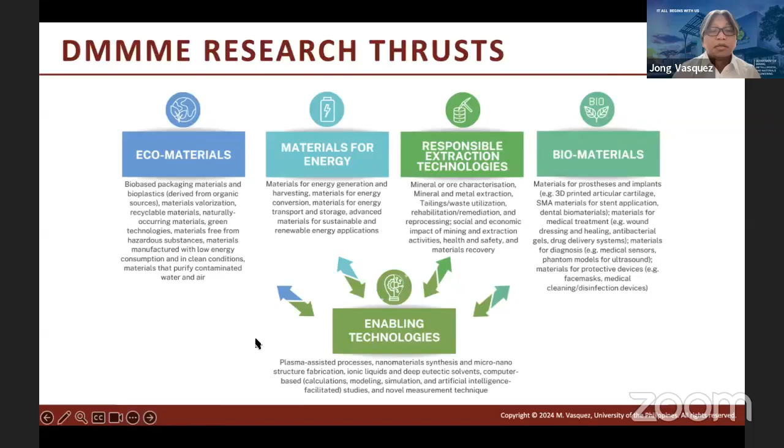This is our lab, the Plasma Material Interactions Laboratory. This was founded 10 years ago, and so far we have trained and graduated 88 undergraduate students, around 34 graduate students, and we have published more than 60 publications. In terms of funding, we're able to generate more than 300 million pesos worth of funding.

In the lab, we have this approach, similar to what Professor Henry Ramos also did when they had the plasma physics lab. So we have adopted a modular open systems approach. In this way, for a given system, we're able to configure and try different configurations of the system without really buying a lot of components or parts.

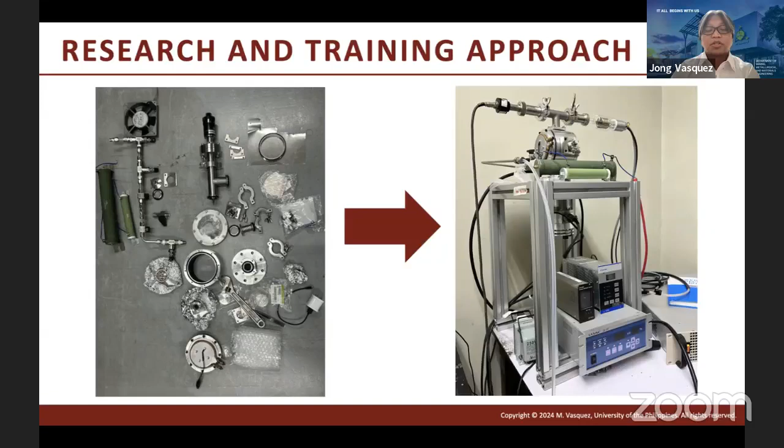This is an example of how we design and build our system. This was built by one of my students, and she assembled this and then used it. This is a compact magnetron sputtering system, and she used this to deposit different films.

In the lab, we are very highly experiential. Students and researchers are heavily involved in doing research, from designing, doing some models, assembling the system, and then, of course, operating and troubleshooting.

We are also highly collaborative, and our new members or new users shadow experienced or senior members in the laboratory, so we want to ensure continuity of the skills developed in the laboratory.

These are just examples of the systems that I have designed and built. Most of these are still in Japan. And this is now our laboratory.

We have different deposition systems. We have a single target magnetron system like this one, and this one is a multi-target magnetron sputtering system. This is a low energy ion source, CVD system, and other deposition systems.

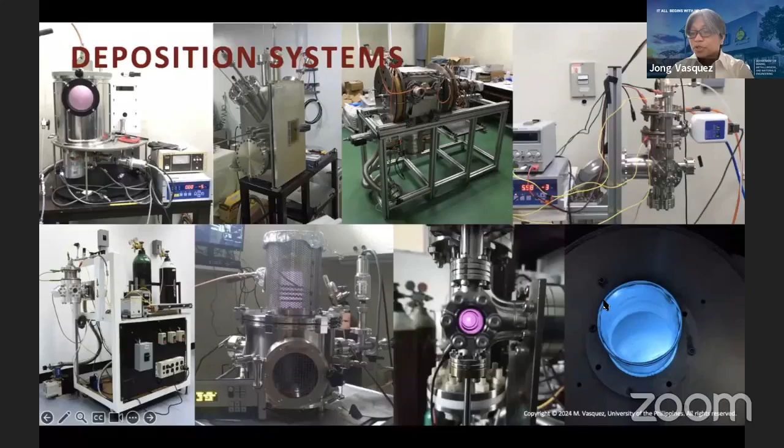We also have systems that we use to modify surfaces like this one, which operates in high vacuum and in subatmospheric conditions.

Recently, we've been developing atmospheric pressure plasma systems as shown here. We have a jet type and dielectric barrier discharge type systems, where we use these to modify different surfaces, both organic and inorganic.

And then these are newer systems. This again is the compact magnetron system. At the center, we have a multi-target magnetron sputtering system, also compact, just a small one.

On the right, this is a DBD system that we use to modify cotton threads, so we can improve, for example, its dyeability, its wettability, and so on.

In the lab, we also have the UP Diliman microfabrication facility. We have some equipment that can be used to fabricate devices and basic characterization tools, including a clean room, or the white room, and the yellow room.

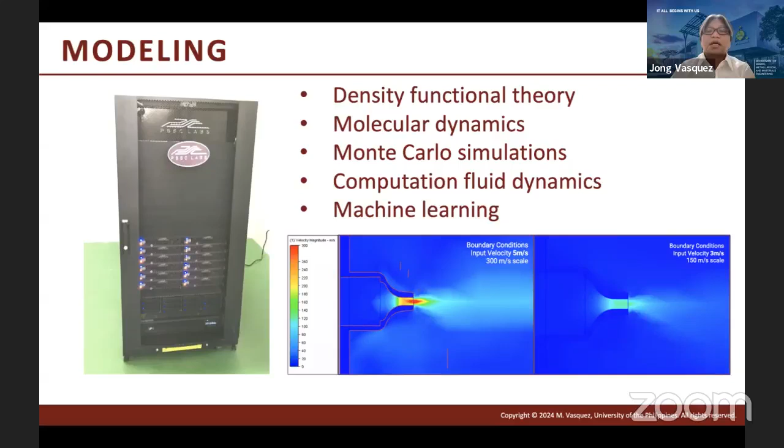We also have our computing system, around 200 cores, where we do basic materials modeling, mostly DFT, MD, and Monte Carlo simulations. More recently, we've been doing computational fluid dynamics for our plasma jet nozzle simulations.

Rapid prototyping is also important. Once we have our design, the simulated model and so on, then we have our 3D printers where we fabricate our own nozzles and use these nozzles to try in our atmospheric plasma system.

In this case, by just varying the width of the channel, we have different effects or different ways of producing the plasma plume, like shown here. Though maybe in the picture it doesn't really show any difference, in actual operation there's some difference.

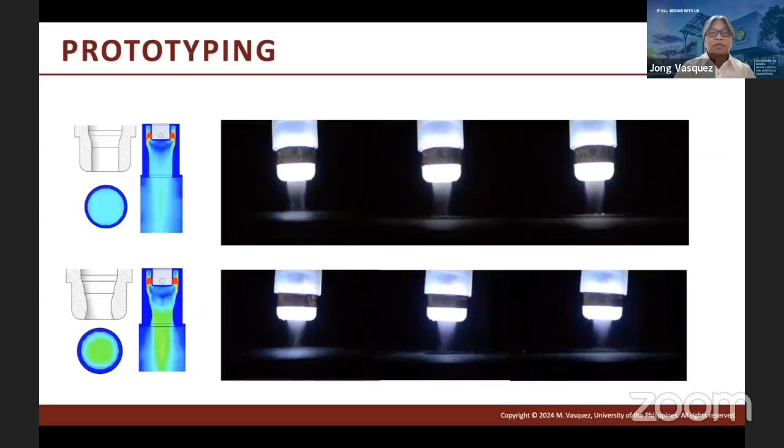This is another modification, and because of the rapid prototyping process that we are doing, we can do a lot of iterations of different nozzle designs like these two.

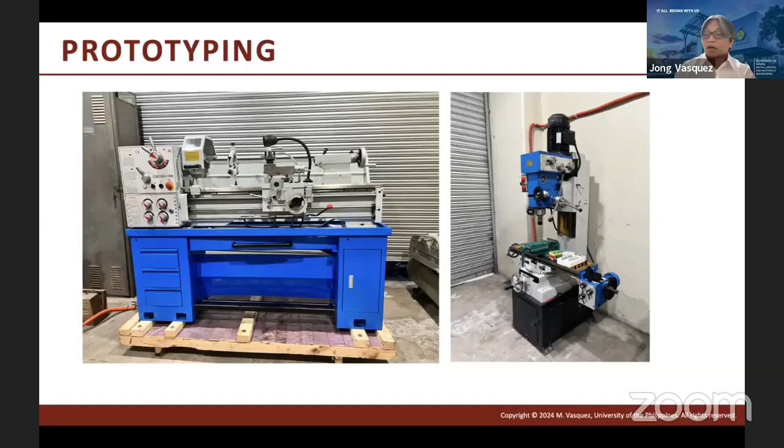After that, we also have basic machining tools, and we use these to finalize the nozzles that we have developed for actual application.

In our laboratory, we do a lot of research on device development like PVD or physical vapor deposition, CVD or chemical vapor deposition, low energy ion sources, and atmospheric pressure plasma sources. Most of our work involves either growing thin films or modifying surfaces, and in terms of materials, it is also broad, from metals to nitrides, oxides, and even polymeric materials.

And in terms of applications, we have also varied applications depending on the need of the industry or the priorities of our science, our Department of Science and Technology.

So let me now shift my talk to plasma. What is plasma? If you're watching this right now, you might be using a device that at one point in its process went through a plasma-based process. So why plasma? Because we can't get along without computer chips and mobile devices.

In the previous decades, probably since the 1960s and 70s, plasma has been heavily used in the production of integrated circuits. At present, we are diverging or looking at other applications of plasma outside microelectronics.

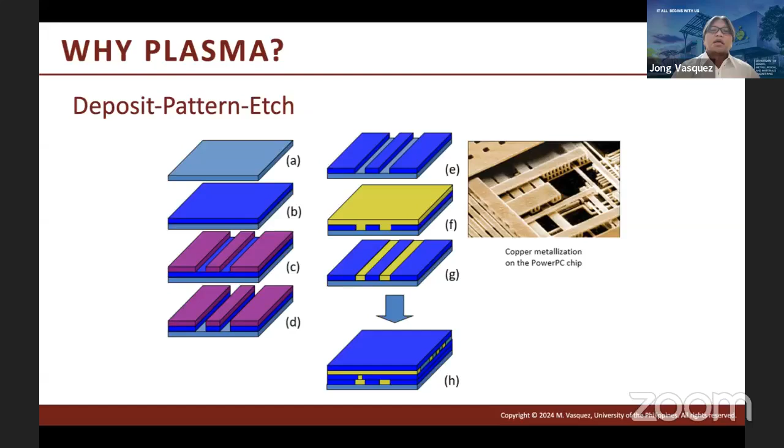So before, plasma is one of the processes used to fabricate these computer chips or the device. It's a series of deposit, pattern, etch, and so on.

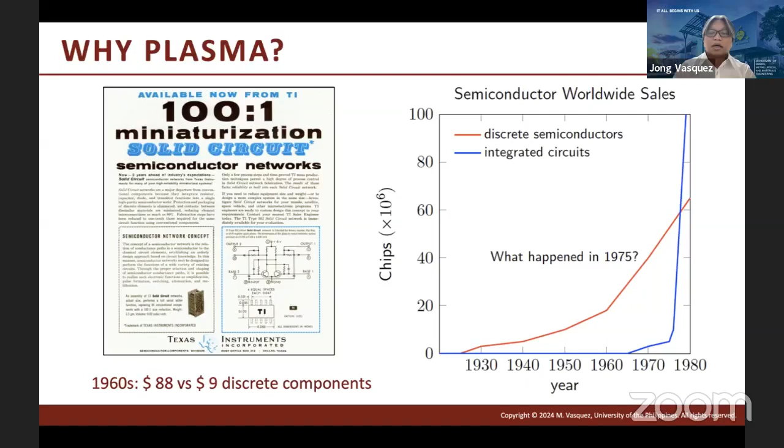Without plasma, we probably would not be enjoying integration of our devices. Unlike before, when we used to have discrete components, with plasma, or actually with the use of ion sources or ion beams, we're able to miniaturize and integrate these transistors in a very small area. And that's why we have solid state electronics.

Aside from that, we have plasma around us. You may not be aware, but you might be using devices that were enabled by plasma. So plasma and the technologies they enable are pervasive in our everyday lives. Each one of us touches or is touched by plasma-enabled technologies. Because of this, we have better quality of life now and improved economic competitiveness.

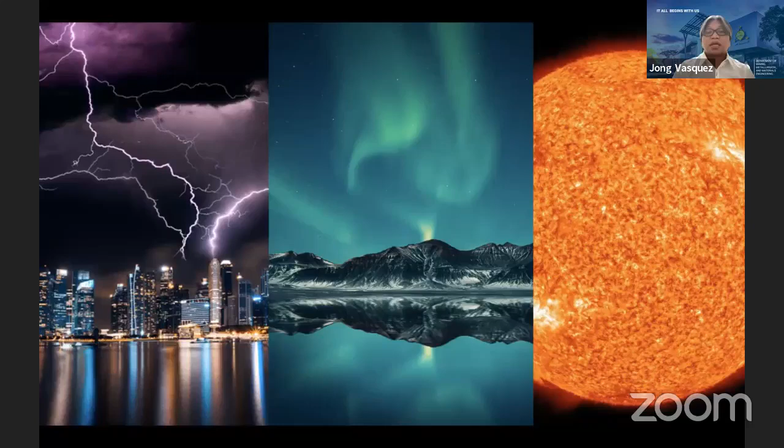So plasma is everywhere. It occurs naturally, like the sun or lightning or even the aurora. But what we are interested in are plasmas on Earth. We call this terrestrial plasma. Two common examples of this are the neon sign and the fluorescent bulb.

To further illustrate plasma, let's look at this. You have a solid, usually the atoms are ordered, but once you start increasing the temperature, it starts to liquefy. Another example is ice. Once you heat ice, it turns to liquid, so it becomes deformable. The atom arrangement now has some separation between these atoms or molecules.

As you further increase the temperature, the separation becomes longer and you create gas, and it becomes compressible, and so on. The further you increase the energy, then you start to separate the electrons from the atoms, and now you create charged particles in the system. So you will have neutrals, gases, ions, electrons, and so on.

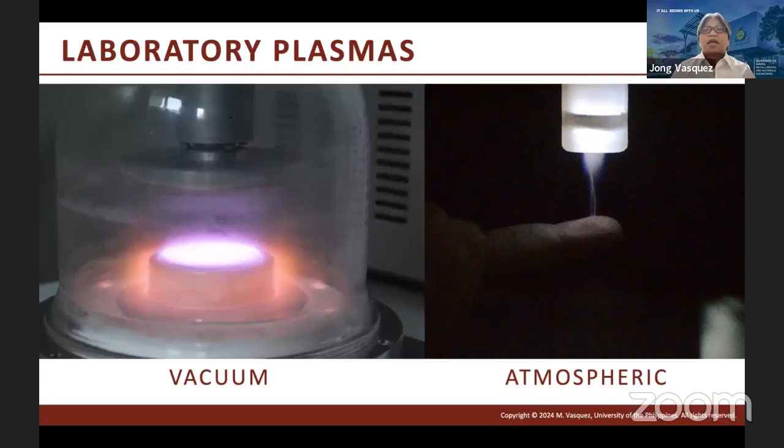As I mentioned, we are interested in laboratory plasmas, either in vacuum or in atmospheric conditions. These are some of the devices that we have in our laboratory. So how do we create plasma?

Essentially, one way of producing plasma is by accelerating an electron and making that electron collide with a neutral atom like argon. If the kinetic energy of your electron is more than or higher than the ionization energy of the atom, like argon, then you have a high probability of ejecting another electron from that argon atom.

And you create an argon ion.

In terms of electrons, electrons can be emitted by a filament. You can do this by heating the filament to produce thermionic emission, and then accelerate the electrons away from the filament. Once it collides with a neutral atom, then depending on the energy, it's possible that the atom can be ionized.

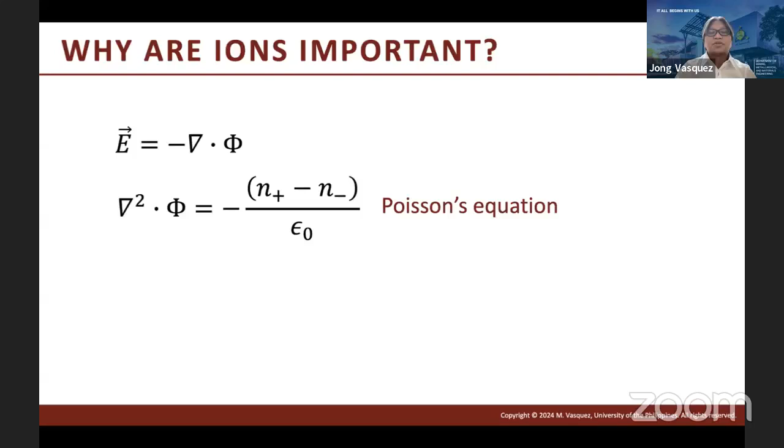So the reason why we want ions is because we can manipulate the charged particles using electric fields or magnetic fields. In this way, you will have more control in terms of the interactions that you want to get from these gas discharges. So if you're interested in the density of your charged particles, then you can solve the Poisson equation.

So when we create plasma or ions, there are two things that we have to be aware of. One is the creation of charges—this is the ionization step. And next is the transport of these ions: how do we make these ions move so that they interact with your material?

So in general, if you have a plasma, then you have your neutral gases or neutral particles. You may have some excited gas particles—they are not ionized, but they're just in the excited state. Some gas particles may be ionized, and you have your electrons.

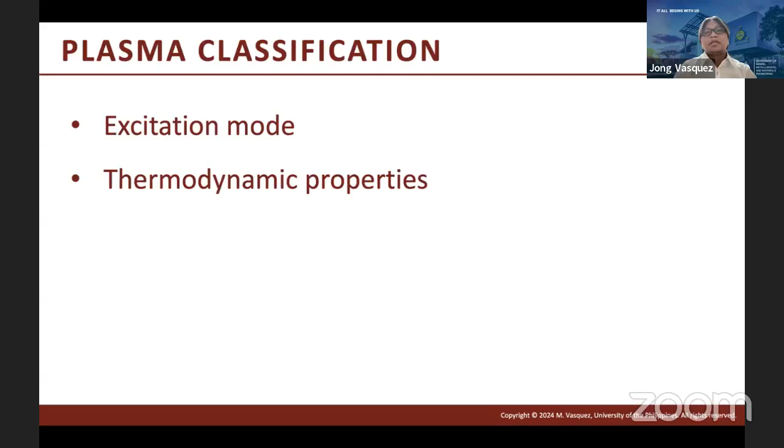Now, when we classify plasma, there are two ways to classify this: either in excitation mode or in terms of its thermodynamic properties.

In excitation mode, if you're familiar with plasma, you can create gas discharges either using direct current or alternating current. For DC, you can create a good glow discharge. If the potential is high, then you might create some arcs or corona. Another configuration of interest is hollow cathode discharges.

If you have alternating current, then you can use dielectric materials like in dielectric barrier discharge to produce the discharge. And then you can use high frequencies to produce the plasma.

Now, between DC and AC: in DC you have limitations in terms of the use of electrodes, because they should be conductive. Unlike alternating current, where you can use different materials, from conductive to non-conductive. For direct current, usually the plasma is low energy—actually, it's low density but high energy. Unlike in alternating current excited plasma, where the density is high but the energy is relatively low.

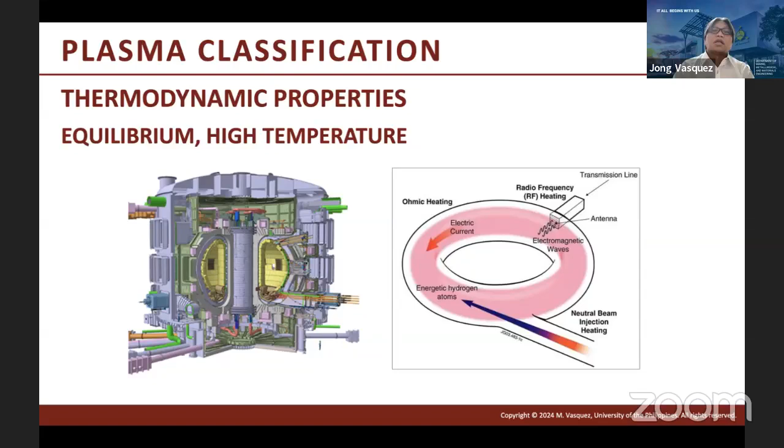Comparing high and low temperature plasmas: at high temperature, you achieve close to full ionization, meaning all of your gas particles are ionized. In low temperature or cold plasma, you have partial ionization, and usually this ionization is really low, especially at low pressure or vacuum.

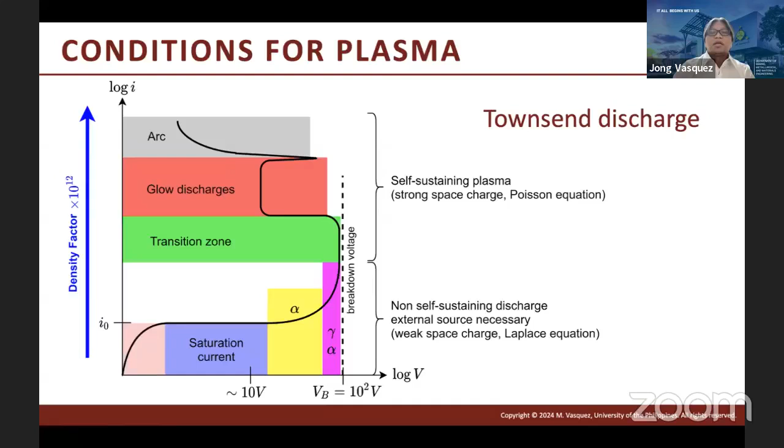In order to sustain the plasma, you also have to understand Townsend discharge. Even if you create charges, sustainability is still difficult - you may create the plasma, but it will just self-extinguish. So you need to increase the potential until you reach the sustaining region of your discharge. This is where you also produce secondary electrons in your system, which are used to sustain the discharge.

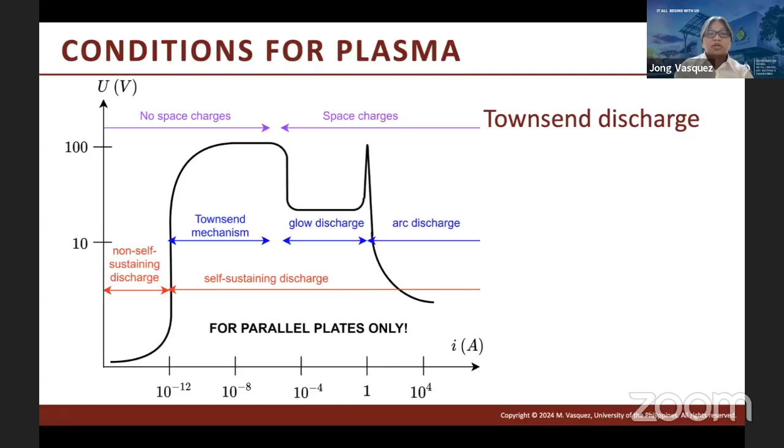For any plasma physicist or engineer, they also need to understand the importance of the sheath. Sheaths are created between the discharge and the surface, and there's always a region with a different potential. Because of the mobility of the electrons, the tendency is that the wall becomes slightly negative, while the discharge is slightly positive. Once you have your electrons, you create that sheath potential, where your positive ions are accelerated through that potential.

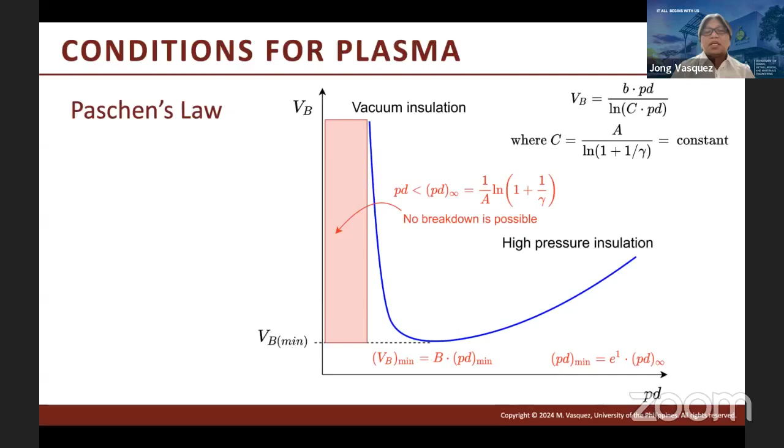You also need to understand Paschen's law, which gives the minimum voltage needed to break down your gas. Depending on the pressure and the gap between your electrodes, you can have an idea of how much voltage is needed to create your plasma or discharge. So those are some of the things - plasma is a really complex system, so you need a lot of understanding, and you have to look at different equations in order to solve this plasma problem.

Now let me go to plasma surface interactions, because this is really the topic of this talk. Once plasma is interacting with a surface, there are two things that really happen. One is that the plasma interacts with the surface or material, and the plasma becomes sort of contaminated, because you will have particles and charges coming from the material surface.

Again, depending on the application that you want, you can take advantage of this effect. In addition, the surfaces are also degraded or enhanced due to the heat and momentum flux of particles coming from the plasma. So plasma charges and plasma species interact with your surface, and depending on the goal of your interaction, you can degrade the surface, such as etching, or you can enhance it, such as functionalization or growing a thin film. So again, it depends on your goal.

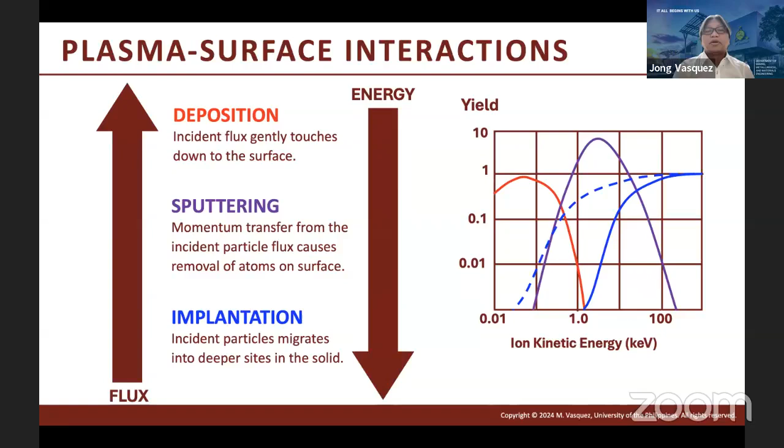As you can see, as the energy increases, the flux starts to decrease. So you have more particle flux, more particles coming or arriving at the surface, at lower energies.

In terms of energy distribution, plasma follows this Maxwellian type distribution, and you always have this high energy tail of the plasma. The population may be small, but sometimes the effect of these high energy ions or atoms can be detrimental to your process, like if you're developing a device.

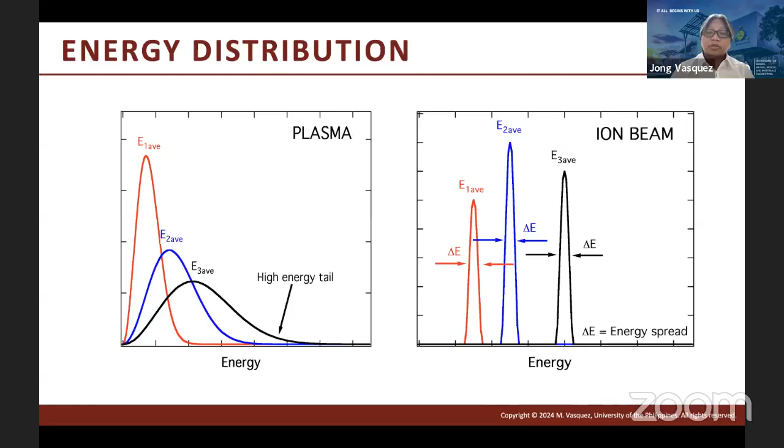So sometimes you can narrow down the energy distribution by extracting the ions, and you produce an ion beam. With ion beams, you have a narrower energy distribution, which allows you to have more control of your process.

In our work, we actually use weakly ionized plasma, low temperature plasmas. For us to produce this plasma, it should be electrically driven, either using DC or RF. And because it is weakly ionized, you have more charged particle collisions with neutrals, and this is where different effects are induced through these collisions.

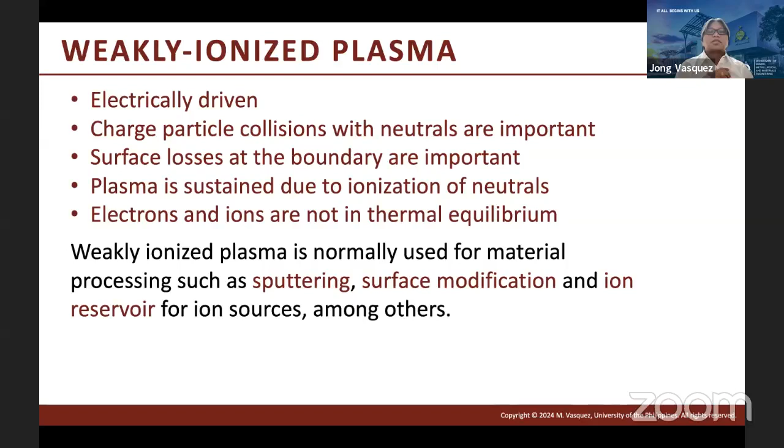Surface losses are also important at the boundaries, and plasma is sustained due to ionization of your neutrals. As I mentioned earlier, electrons and ions are not in thermal equilibrium. So it is this type of plasma that we use for different material processes, such as sputtering and deposition, surface modification, and it can be used as an ion reservoir for ion sources.

Plasma has been used for surface engineering. This can be in films, such as coating on a surface, or modifying the surface. In surface modification, you can induce physical effects or chemical effects. Talking about thin films, essentially you are putting another layer of material on a surface.

Depending on the target application, you can control different film properties like its wear resistance, chemical inertness, thermal stability, friction reduction, and other properties such as optoelectronics. So that's for the film.

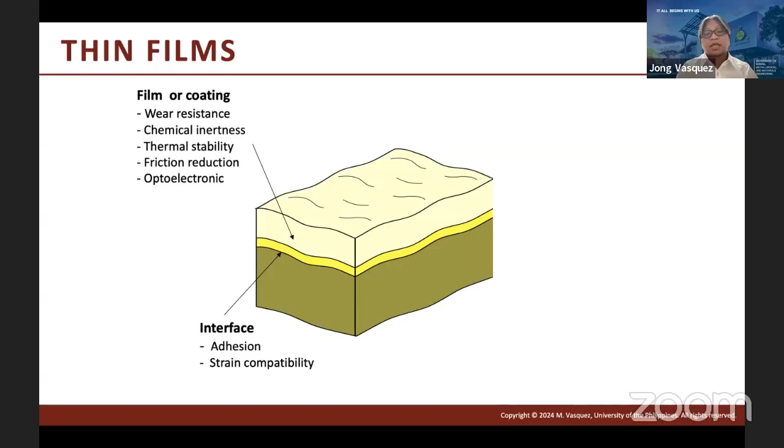But it's also important for you to understand the interface between the substrate and the coating. This is where you should improve, or you should have good adhesion between the film and the substrate, as well as less strain, or less mismatch between the film and the substrate.

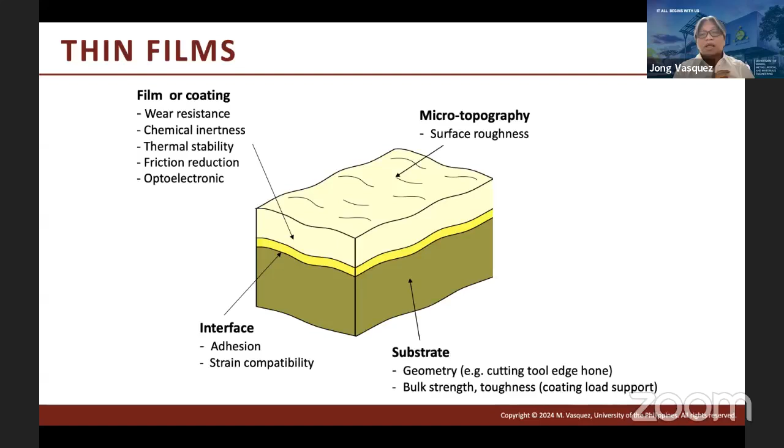Sometimes the surface is also important, so you can control the smoothness or the roughness of the surface of the coating. And finally, the substrate - it is important to understand what type of material your substrate is, the geometry, as well as its other properties, mostly mechanical properties.

You can have functional films. It can act as a barrier, it can act as a catalytic material, and so on. Thin films are also used for implants, because there are some implant materials that are less compatible with bodies, or living things. So we coat the surface with a compatible coating.

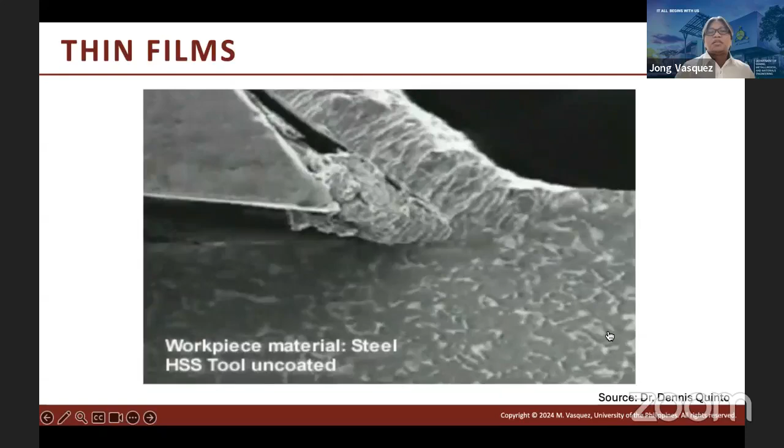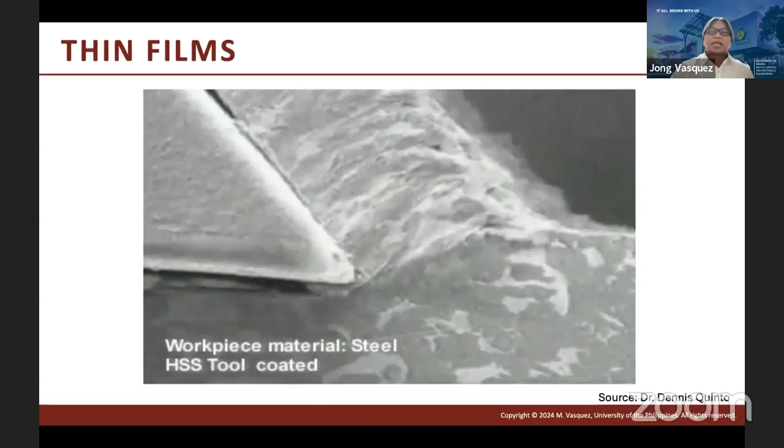When the tool is uncoated, after some time, because of poor heat dissipation, you have debris accumulating on the edge, and this makes the precision cut less precise. Eventually, because of the inefficient dissipation of heat, the material will break or fail. But with coating, if you choose the right coating, it can dissipate heat easily and have a low coefficient of friction, so you get a smooth cut. That means with coated tools, you can increase the lifetime of your tools, and that's where coating becomes important.

One of the major processes used in coating or growing thin films is sputter deposition. Imagine billiards, playing billiards: once the cue ball hits the other balls, they just scatter. The same principle is used in sputtering. You have an atom accelerated to the surface of a target, and depending on the energy, if it's too high, it's able to remove particles from the surface. So that's the sputtering process.

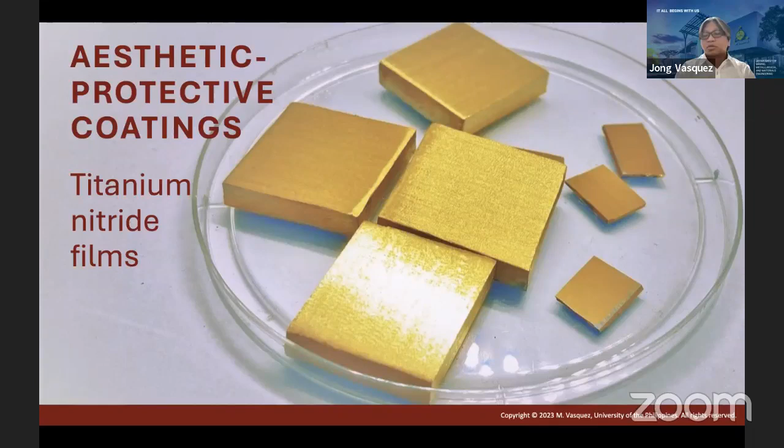In our lab, we've been developing aesthetic and protective coatings. What we want to do is try to mimic or produce gold coated tools or surfaces. If you're familiar with titanium nitride, it's actually gold in color, but you still need to tune certain process parameters so the color is similar to gold. We were able to test this, and it's really close to the natural gold color. Aside from that, because it's titanium nitride, it also has good anti-corrosion properties, at least based on this test.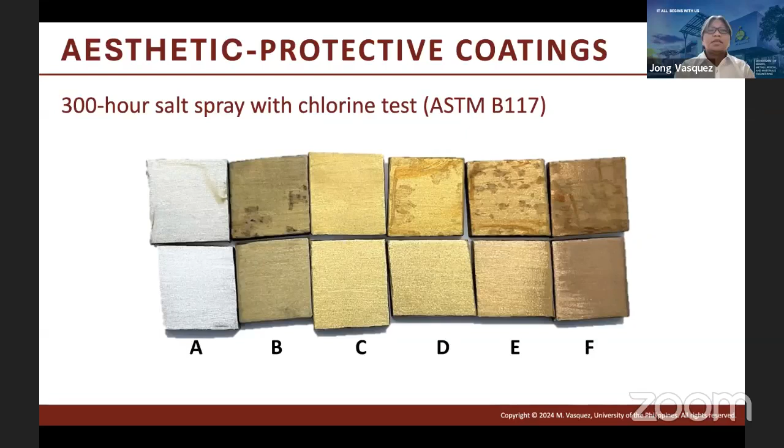We did a salt spray test with chlorine, because one of the interested users of this technology are companies or resorts located along the beach. They have a really big problem with corrosion because they are near the sea. We have also tested its adhesion properties, and we have really good adhesion between the surface and the substrate.

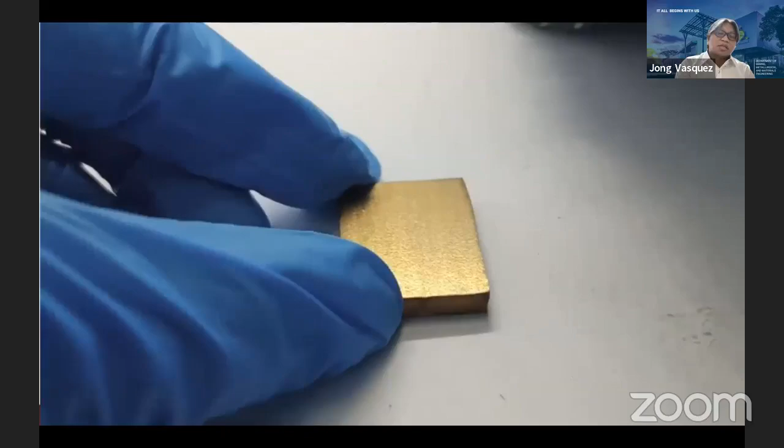Also, abrasion-wise, it's not really abraded. Here's a demonstration just using steel wool, and we can see that if we try to scratch the surface, we actually did not create any scratches on the surface. In fact, it was the steel wool that was damaged during this test.

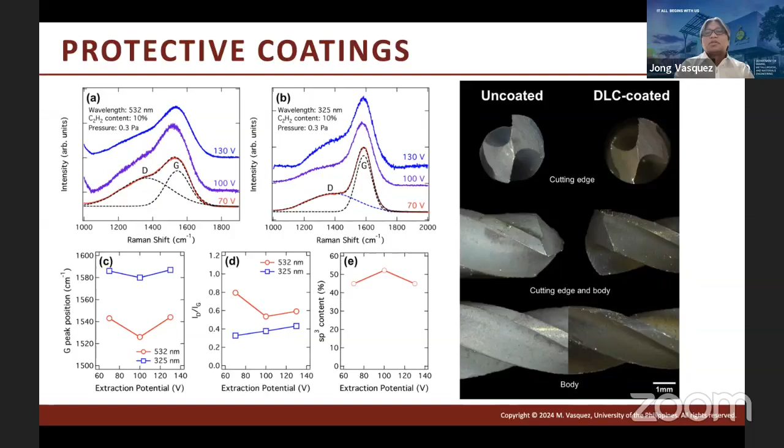We've also done diamond-like carbon, or DLC, coatings. This is an example of a DLC coated drill bit. We successfully deposited DLC and improved its hardness. We tested its hardness in terms of the number of holes it can produce, and we were able to more than double the number of holes when the tool is coated with DLC.

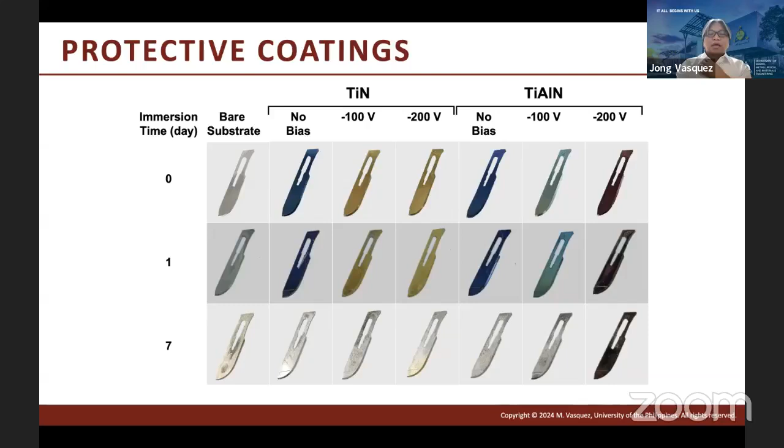This one is just a basic scalpel blade. We wanted to test if we can sustain or maintain the sharpness of the blades once coated, because the coating can protect the blades from harsh conditions. Although we know this is disposable, we just wanted to demonstrate that if you coat the scalpel blades, there's no change in sharpness, but you can improve its anti-corrosion properties. We did the test on pig skin and found no difference in sharpness, but we improved its hardness, its anti-corrosion properties, and so on.

We also have catalytic thin films. We actually use this for wastewater degradation. These are titanium dioxide-based catalysts, and we use them to degrade organic matter in aqueous solutions.

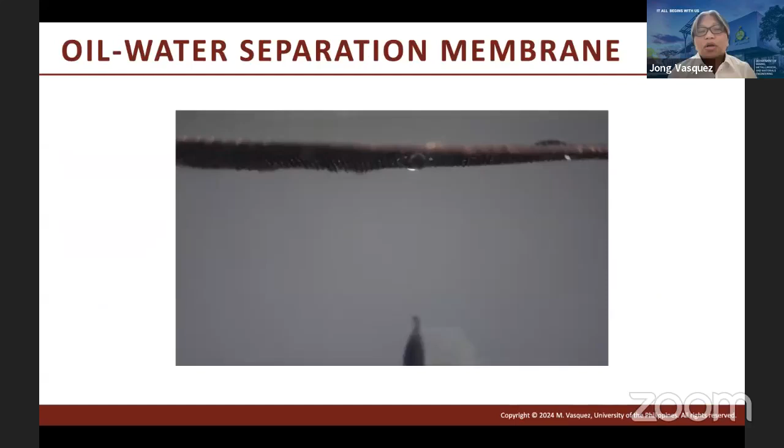This one is an oil-water separation membrane. We deposit different materials on a mesh and use this to separate oil and water. The good thing about this material is that it also has self-cleaning properties, so if we expose it to UV light, we can remove any residual oil on the mesh.

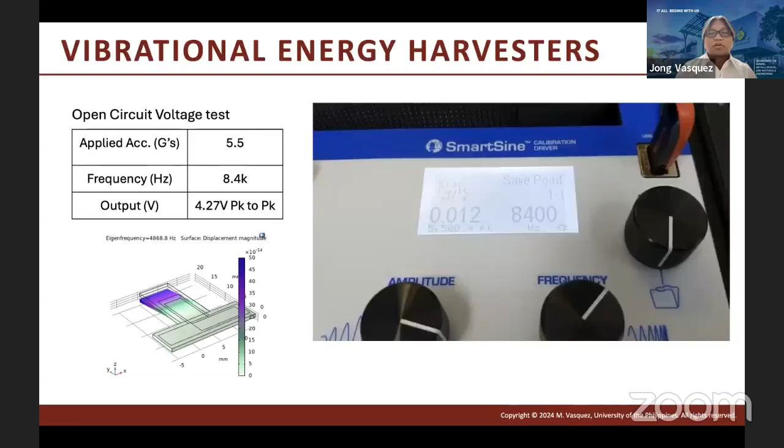We also did some initial work on energy harvesters. These are piezoelectric zinc oxide films, and we want to use this as a vibrational energy harvester. Although it still operates at high frequencies, we're improving this to shift it to detect lower frequencies.

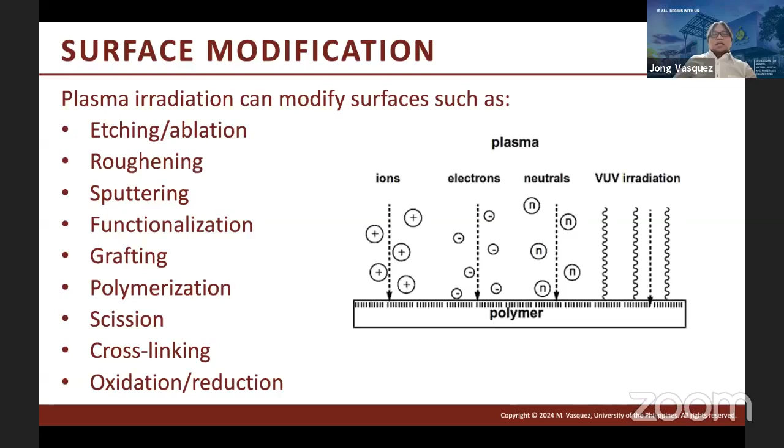Now let me go to surface modification, because this is also very important to us. When you have a surface exposed to plasma, you have different interactions, and as mentioned earlier, it can be physical or chemical interactions.

One major application of surface modification is functionalization. Essentially, you're attaching a functional group on the surface of a material, and depending on that functional group, you can induce it to be hydrophobic or hydrophilic. Functionalization is limited to a few angstroms, and this is good for heat-sensitive materials because we are using cold plasma here. Three-dimensional objects can be treated without difficulty, and it's easy for us to integrate this in a processing line.

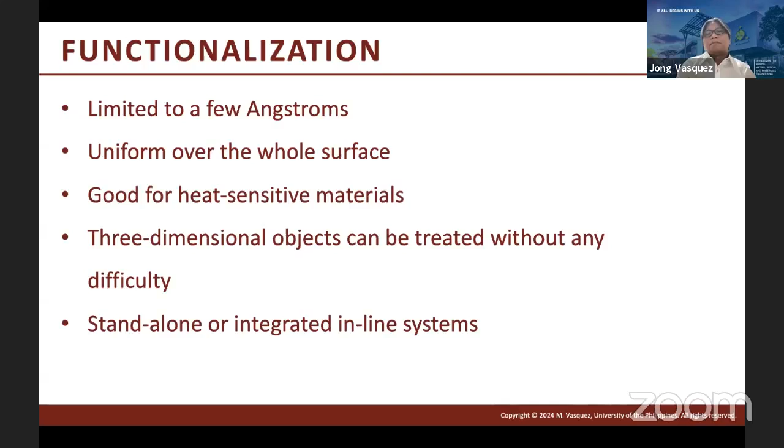One major drawback of functionalization is its aging effect. After some time, hydrophilic or hydrophobic materials can revert back to their original property. If this happens, you can use the material immediately after treatment, improve the cross-linking treatment properties of your discharge, or store it at low temperature or in a polar solvent. Your functional groups might migrate, or there might be some rearrangement on the surface that makes it go back to its hydrophobic property.

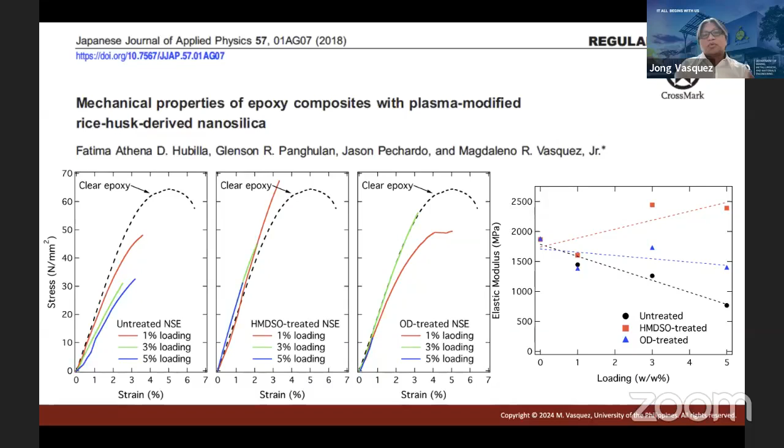Here's an example. This is a rice husk. Rice husk is just a waste, and we want to extract nanosilica from it. In order for us to use the nanosilica, we treat it with plasma, functionalizing the nanosilica with mostly silane groups to improve its compatibility with epoxy. So we use the modified nanosilica in epoxy resin.

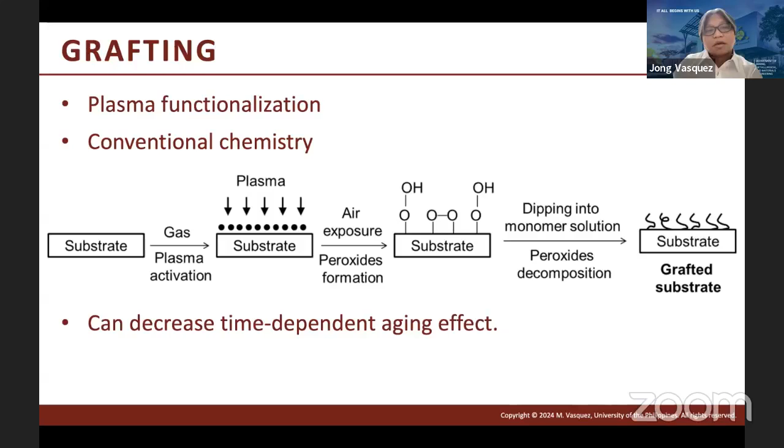Another important application of surface modification is grafting. It's a two-step process: first you functionalize the surface, and then you rely on conventional chemistry to improve the addition or attachment of a functional group. With grafting, you remove or decrease the time-dependent aging effect on polymeric materials, so the effect is more long-term.

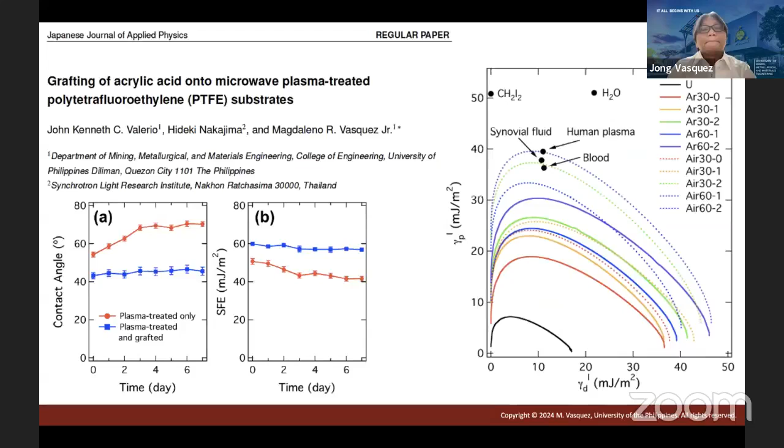Then we also have polymerization. Polymerization is more permanent and thicker compared to functionalization and grafting. This can produce thin, pinhole-free films, and you can vary the structure or composition of your polymer films.

Depending on the monomer that you're using, you can achieve chemical inertness, pinhole-free films. You can use this on various substrates. Thickness is variable, from nanometers to micron thick films, and of course you can have multi-layers or multi-layered films.

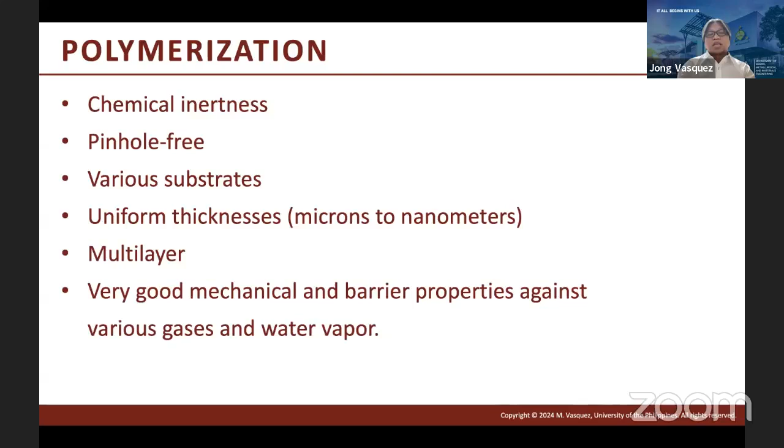Aging also is not a problem because the film is really near its bulk property, so there will be no more change in terms of rearrangement of the functional groups on the surface.

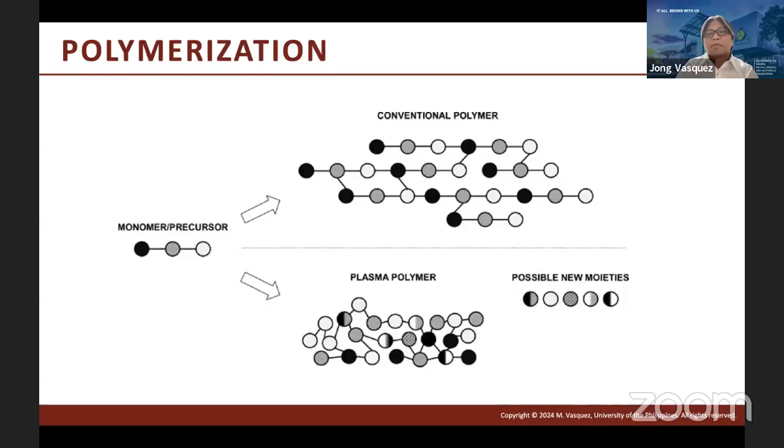Another consequence, or important thing, that you can do with plasma polymerization is actually create a new plasma polymerized film. If you have a precursor, you can fragment it and use that to form another type of film or layer, producing different moieties compared to the conventional polymers you usually make out of these precursors. But there will be a lot of tuning of the different parameters—you have to understand how these monomers are fragmented and so on.

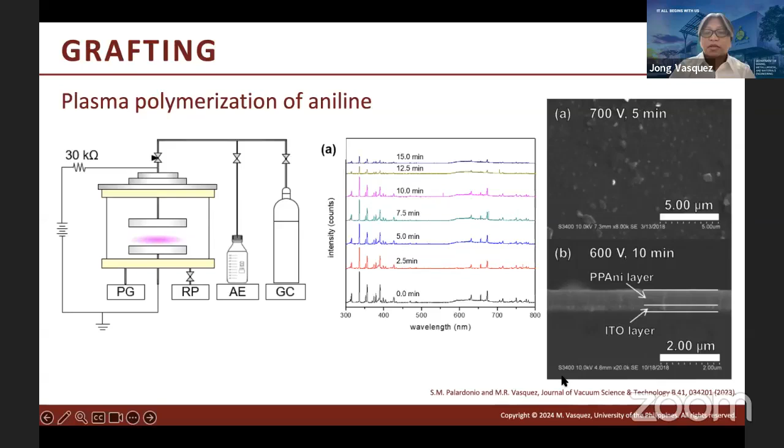So we did this before. We deposited polyaniline on the surface of ITO and glass substrate. One of my students actually designed this basic CVD system. He introduced the aniline and was able to form the film. So this is the film. To know more, you can check our publication on this research.

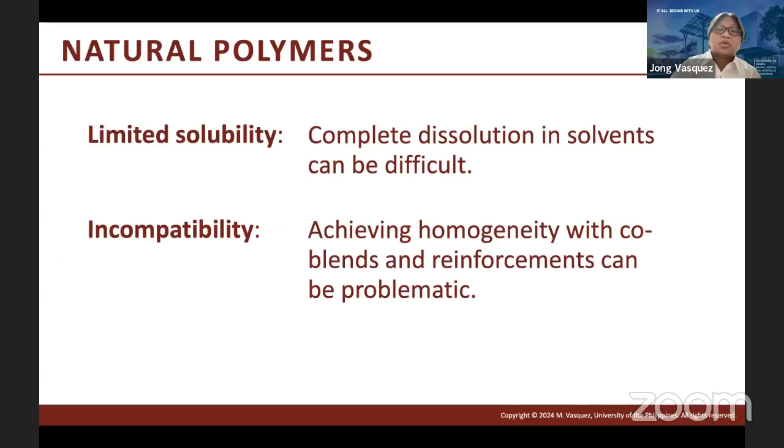Now, another motivation for us to use plasma-based modification is for polymeric materials, especially biopolymers. For natural polymers, processability is a very big issue—not all natural polymers can be dissolved in solvents, and it's very difficult to dissolve them. So what we want to do is improve their dissolution by treating with plasma.

Another ongoing work that we have is kappa carrageenan and alginate. These are again natural materials, and we want to modify them for processability. Before, it's difficult to process this because of its high viscosity, but once we pre-treat the material, viscosity is now controllable, and that means processability is also controllable.

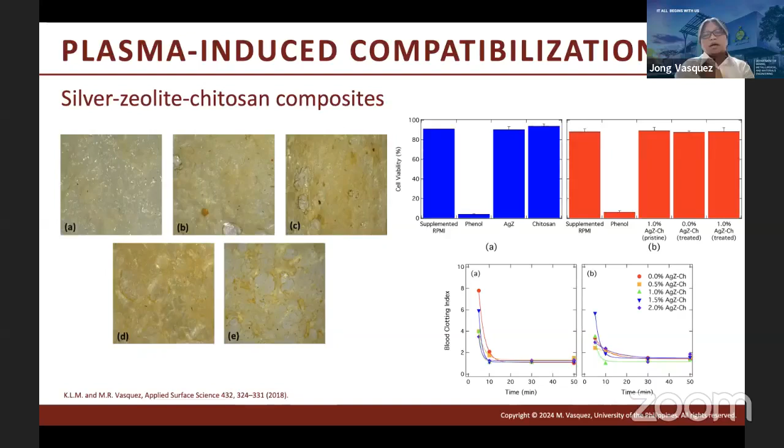So we also have this chitosan composites. Application is for biomedicine. We also have the hydrogels, used also for wound healing. This is also ongoing work.

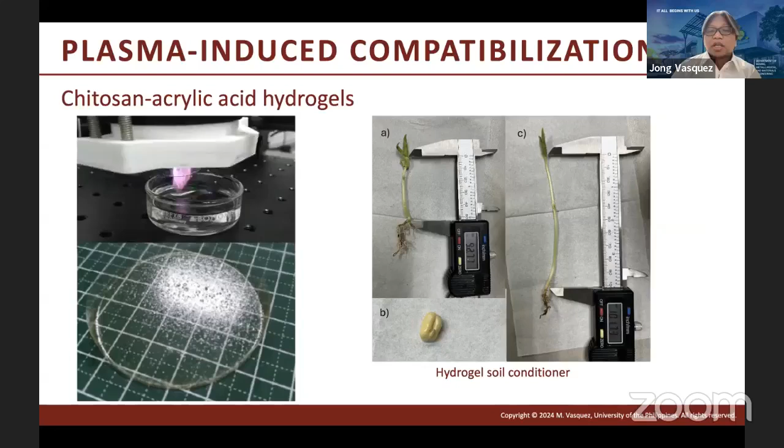We also have hydrogels again, but this one for agriculture, and we want to use this for soil conditioning. So we have started also plasma agriculture, but again, we are still in the initial stages. We want to continue working on this.

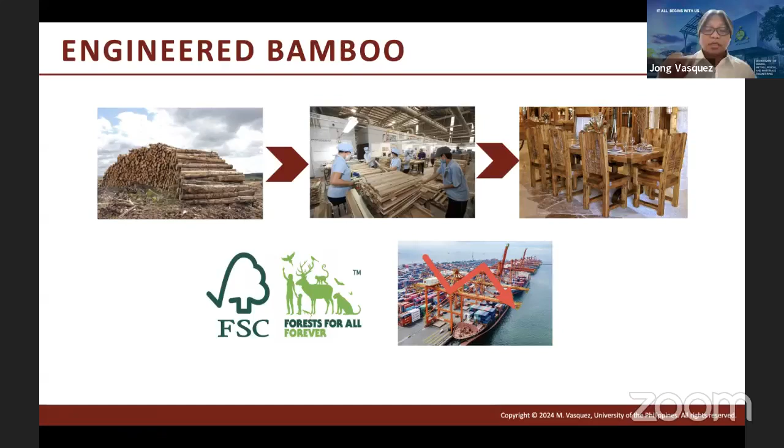Then another important project that we're doing now is modifying bamboo, because bamboo is poised to be an important material for the construction and furniture industry. So we want to create laminates instead of scrimber, because scrimber has a lot of steps. For laminates, we want to create layers of bamboo.

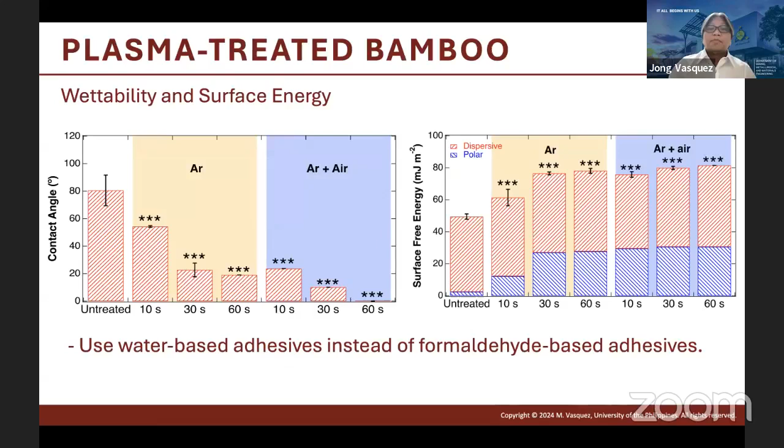The problem is adhesion of bamboo and fire retardancy. So one of my students developed this plasma system, and we want to improve the adhesion of bamboo and also improve its fire retardancy. First, we modify the bamboo, make it more hydrophilic, like this one, and improve its adhesion strength up to 55%. Take note, we're using polyvinyl acetate because right now we cannot use formaldehyde-based adhesives.

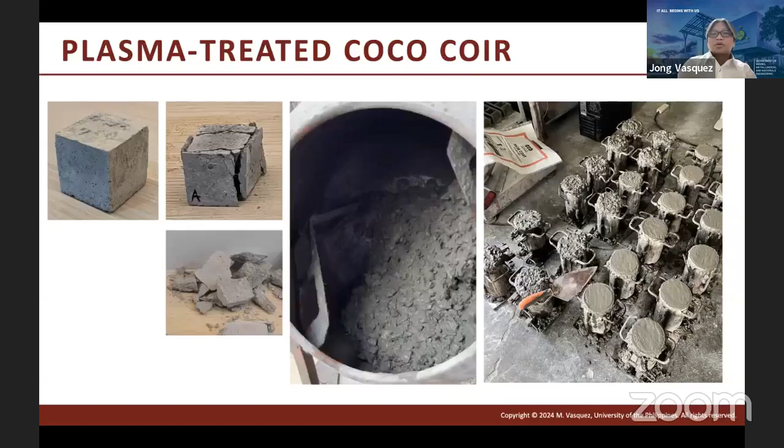This is coconut coir. We have an industry partner who wants to improve the quality of coir or find other uses of coconut coir. So what we did is we make the coir hydrophobic, as shown here, and we can use this as cement reinforcement. We're able to improve, I think, 50% the compressive strength of cement.

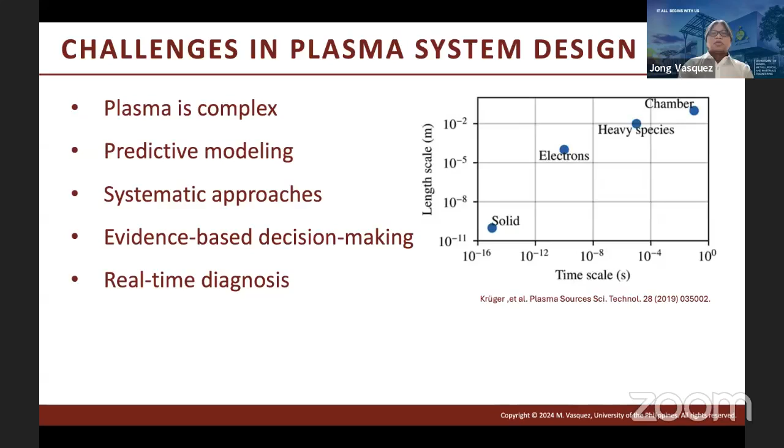So there's still a lot of challenges in plasma system design because of the complexity of plasma. There is a large length scale and a large time scale that you have to take note of. So that's why we want to develop predictive modeling and evidence-based decision-making to improve our plasma systems. Right now, there's also a drive for using data-driven design because, again, modeling alone is not enough to improve your plasma designs.

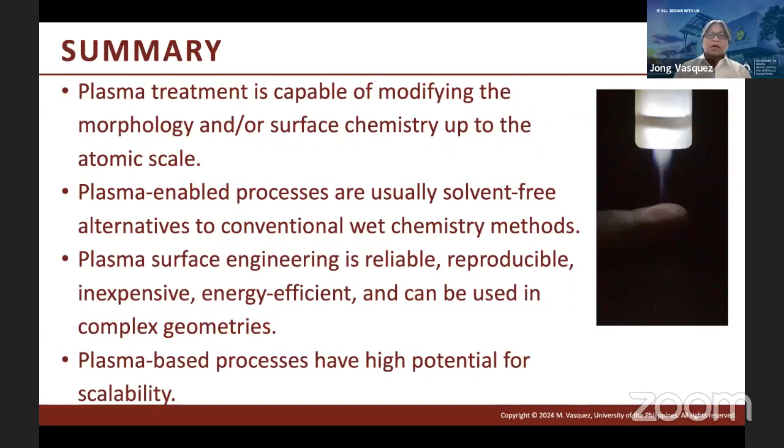So we also see that plasma-based processes, especially atmospheric pressure processes, have high potential for scalability.

So to summarize, to accelerate the development, the community of plasma and material scientists and engineers should work collectively to realize the potential of these technologies to meet the needs of the present without compromising the ability of future generations to meet their own needs.

So I would like to acknowledge our funding agencies, both local and international, because they're very helpful and supportive in continuing our research. And with that, this ends my presentation. Thank you very much.

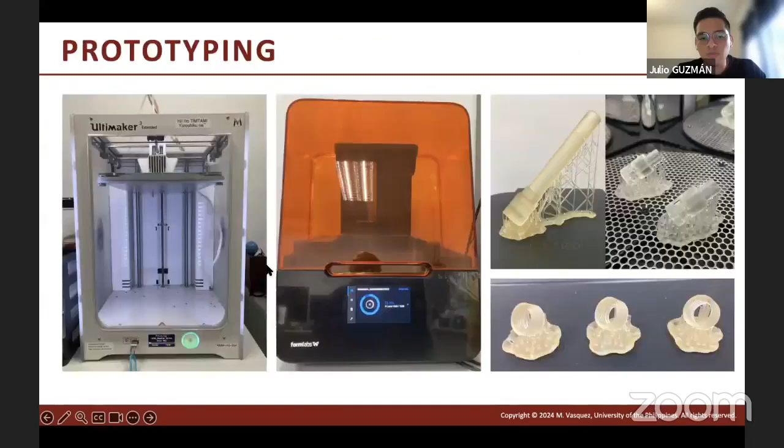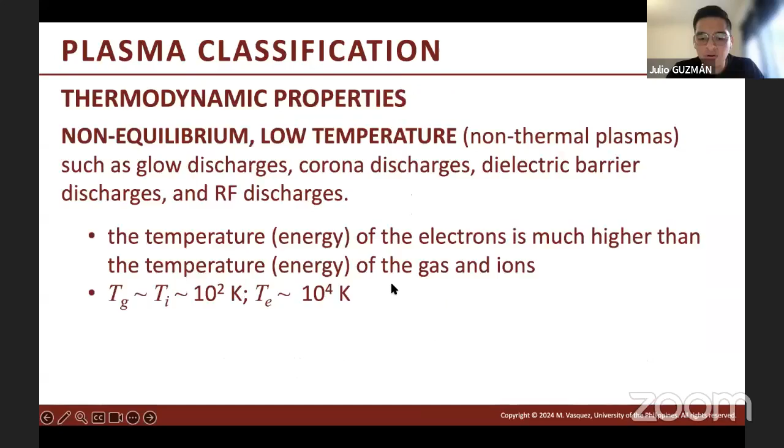Thank you very much for your question. You are very correct in terms of controlling the ion energy. Usually we use electric fields to filter — we can create what we call an energy filter to remove the high energy components. They can be diverted or they can be trapped in a high magnetic field.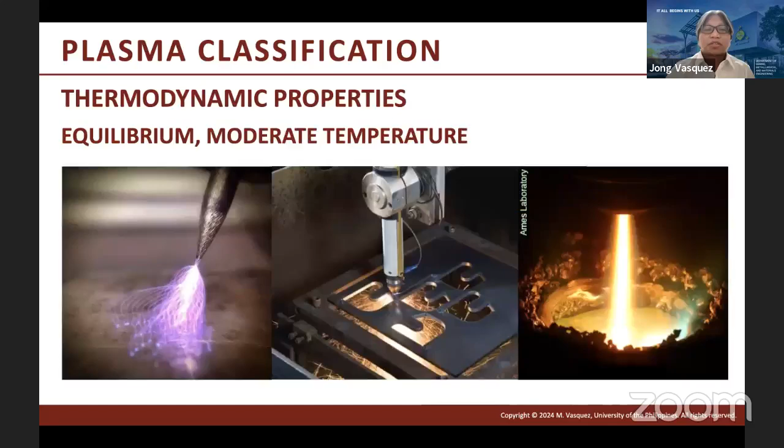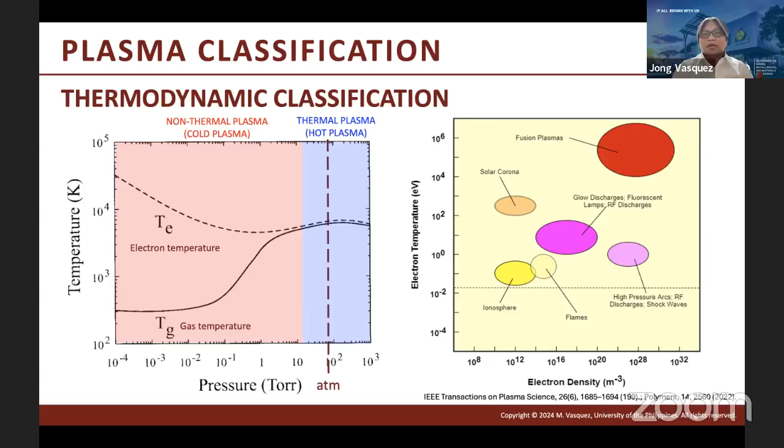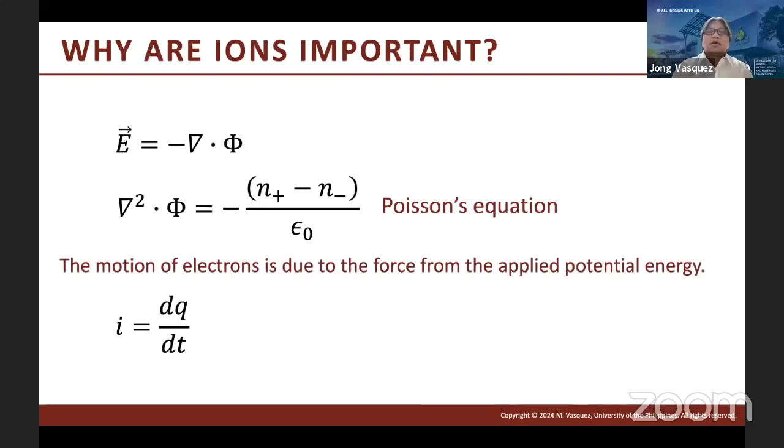I've done that actually, because I tried to extract — let me see, where is that — I tried to extract low energy ions. So when I talk about low energy ions, we are talking really low, like in the hundreds of eV. So that's relatively low. I use a mesh, and in the mesh I apply an electric field, so all the ions are accelerated downstream with more or less the same energy. We call that monoenergetic ions. Although it's very difficult to control because you will have some stray energetic neutrals. The energetic neutrals are difficult to control, of course, because they don't have any charge. So if they are energetic in the first place, they will just go through your electric mesh or your magnetic field.

So that is done in producing ion beams for ion implantation — they just accelerate the ions to certain energies depending on the implant energy that you want. So yes, that's one technique usually done to control ion energies, but for neutrals, maybe it's difficult to control.

I only have one question. In your last slide, you showed us one paper about photocatalysis. Can you tell us about your results in this paper? I asked because I work in photocatalysis.

Okay, so here we have titanium dioxide. Usually TiO2 is active in the UV, ultraviolet region. Our goal for this research is to make it active in the visible light region. So in order to shift the activity of TiO2 to the visible region, usually you couple it with noble metals such as silver. So here we have silver.

In our process, we put the TiO2 in silver nitrate, and the silver ions go to the TiO2, but they remain as ions. So we treat this with electron beam to reduce Ag+ to metallic silver.

If you look at the SEM, we have small particles of silver. We also use Raman to verify the presence of Ag, because Ag, when in a nanoparticle form, has plasmonic properties, so it enhances the signals of TiO2.

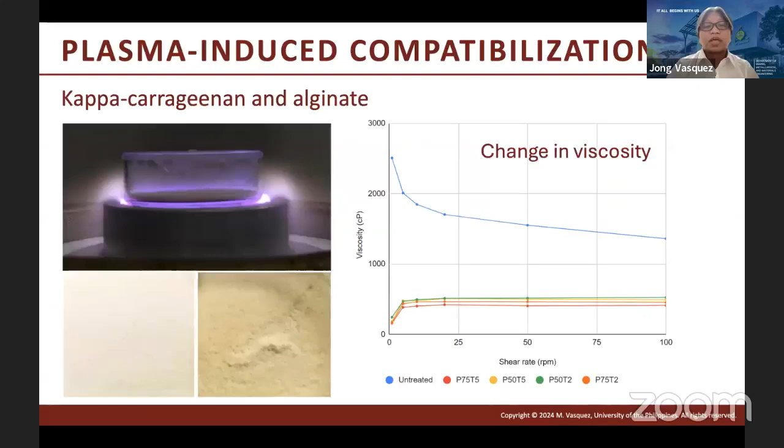So we're able to show how silver and TiO2 can be coupled together to form a visible light active nanoparticle. We're able to achieve that.

Okay, so I think I have a question. Is the titanium dioxide anatase or rutile structure? It's anatase, yes, anatase.

And I think you also measured the conduction and valence band position, or no? With respect to the band gap? Yeah, or not? Yeah, we did measure the band gap.

I don't have the actual data here, but once we have the silver, it's shifted to visible light. I think it's just below 3 eV, maybe 2.8, 2.7. I have to check, but TiO2 is around 3.0 to 3.3 eV, right? Yeah.

So with the silver, depending on the amount you put, you can actually make the coupled structure, what we call a Janus structure. So the Janus structure of silver and titanium dioxide becomes visible light active.

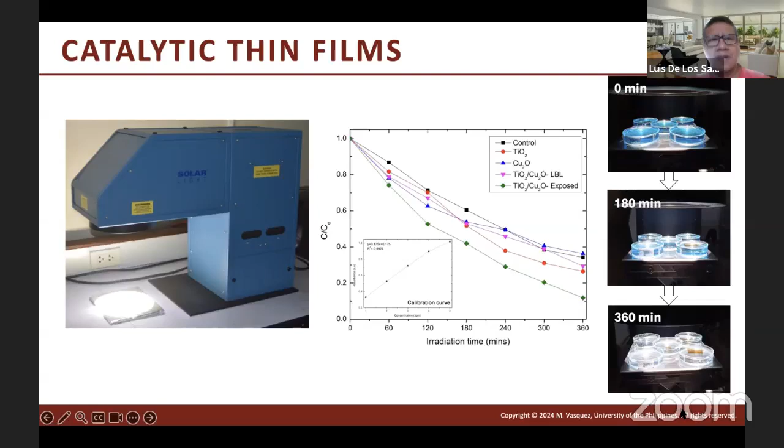Magdaleno, thank you for your very comprehensive presentation on plasmas. Very interesting. I have some small technical questions. You mentioned the effect on the silicon device, I think it was silicon. Presumably you tune the Fermi energy because you're perhaps changing the surface. Do you get any doping effect? Can the plasma create any doping effect in semiconductors?

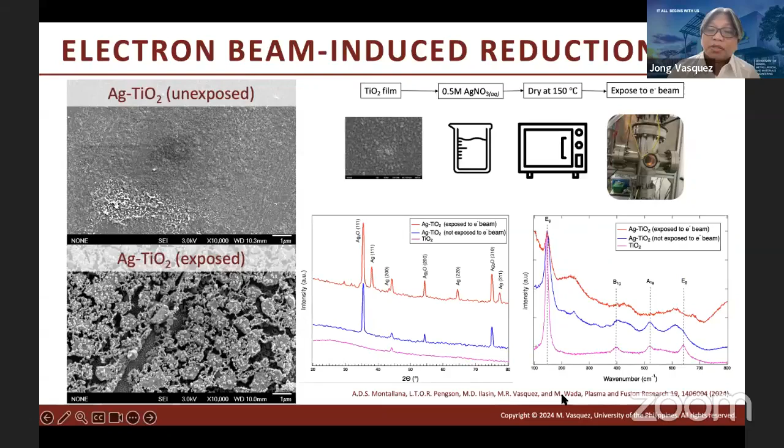Depending on the incident energy, you may have some doping, or you can simply etch the surface, depending on the energy. Although doping might be very difficult at lower plasma temperatures, or with cold plasma. You can maybe dope it if you apply a bias so that you really accelerate the ions and drive them into the surface. But most of the time, it will just affect the surface either by deposition or by ablation, etching the surface.

And we have done that, it's also ongoing. For example, nitriding, where you want to put nitrogen into stainless steel to harden it. If we just use plasma without any biasing on the substrate, it's very difficult to nitride it. But once you apply a bias, usually a highly negative potential, the nitrogen ions are really attracted and embedded on the surface. This creates a concentration gradient, at the surface or near the surface you have higher concentration compared to the deeper parts of the material. But in this case, we don't expect any doping because the plasma is just cold plasma.

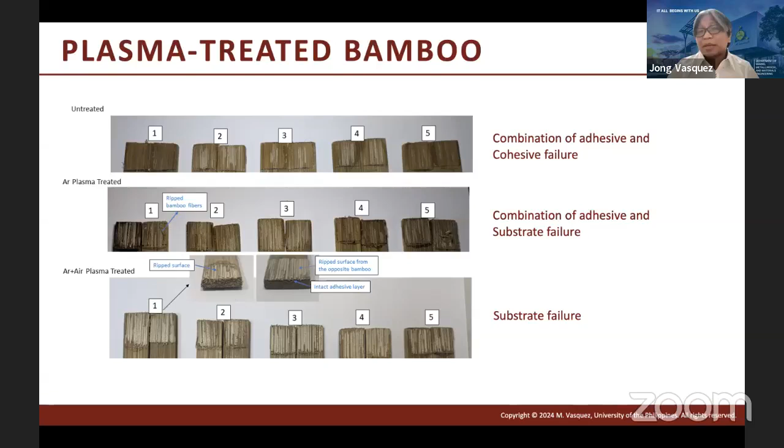It's a good demonstration. Thank you. I have one further comment. You mentioned, go ahead.

You mentioned in your introduction density functional theory. What aspect would you use of this work? Would you use density functional theory for?

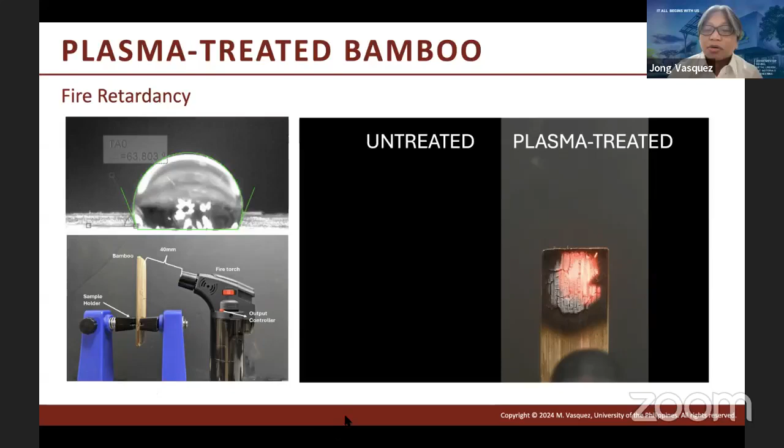Well, our collaborator is working on 2D materials. Our goal is to modify these 2D materials like graphene using plasma, like oxygen ions and so on. So that's where it's coming from. Yes, we actually had that small computing cluster for the simulations.

That's good. Thank you for your answers to my questions, and thank you again for such a very comprehensive talk. Thank you. Yes, thank you very much.